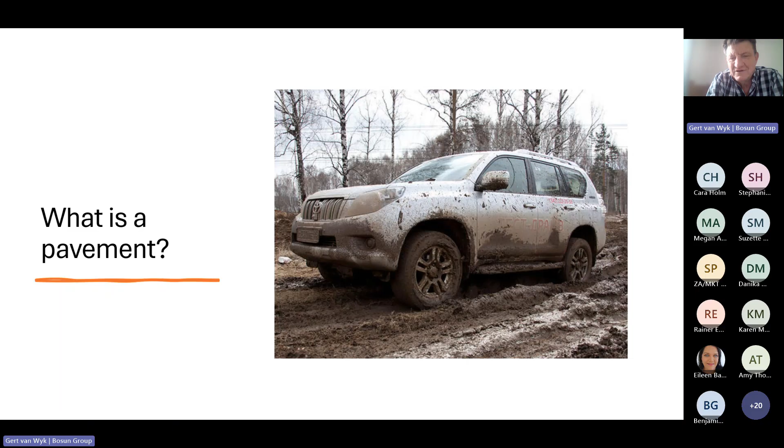So the first thing is, what is a pavement? And the answer is on the screen here. It's the opposite of what we're seeing on the screen here. A pavement is a hard surface, an even hard surface that's easy for people to walk or drive on. It's a mud stopper in the simplest form.

Now, the concept of segmented paving is not new. It's more than 2,000 years old, and the Romans made it their own. The Romans paved with segmented paving, paved thousands of kilometers of roads in Europe 2,000 years ago, and many of those examples are still functional today.

And that's the absolute beauty of segmented paving: the principles since Roman times are exactly the same as what we do today, or what we're supposed to do today. The other beautiful thing is the way they install paving in America, Japan, Germany, England, Italy, wherever, is exactly the same as the Romans did it 2,000 years ago. It's still the same thing we're doing today. So it's not rocket science.

It's not. So we don't want to make you paving installers, but we thought this is a good starting point for us as an industry to just understand the basic principles of segmented paving, because that will make it easier for us on site to communicate with contractors, to understand possible problems that we might encounter, etc.

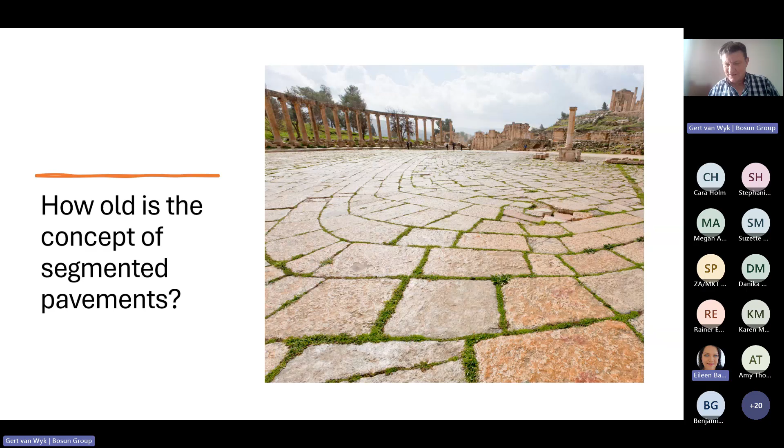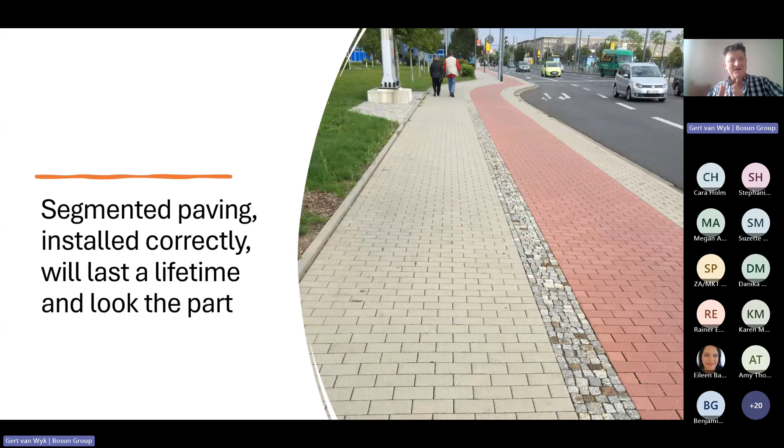I'm not going to spend a hell of a lot of time on this slide. I think all of us have seen this thing in one shape or form somewhere in our careers, but this is the overriding principle when it comes to segmented paving or block paving. If there's one thing we would wish you could take with you from today, only one thing, it would be this: the pavers, doesn't matter what the market is or what the manufacturers tell you, are merely a component of a bigger system. The pavers alone mean absolutely nothing.

What's really important with segmented paving is that you need a system, and this system needs to work together. This system allows weight or loads to be transferred from the pavers into the layers underneath the paving. So like I said, it's quite a mouthful - I'm not going to spend more time on this slide, but this is really the essence of it. We must understand that it's not about the paving as one thing; it is a combination of factors that work together that makes segmented paving do the job for us as human beings.

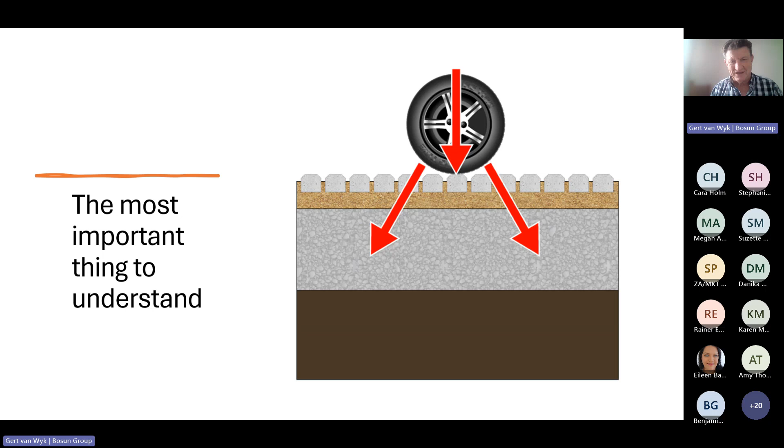So the first component - I said there's only 5, and it's literally as simple as that. The first component we must consider is a foundation. None of us would build a house without a foundation; I think none of us would even attempt that. We all know, since we've been in primary school, or even before that in kindergarten, we learned about the 3 piglets and the importance of a foundation.

With paving, because you can't see it and because people don't necessarily understand it, many times the foundation of our pavements are not what they are supposed to be. Now, I'm not going to dwell on that or make a whole thing out of it - I just want to share the principle.

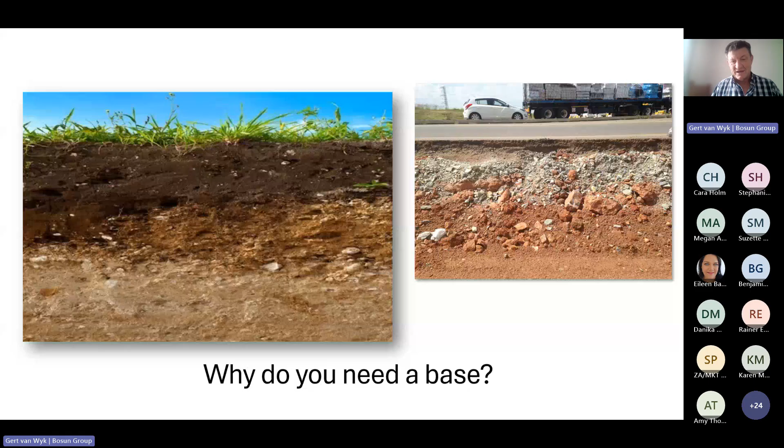Something that we discovered quite recently, and this is something we simply in South Africa didn't know — we were unaware of it. In South Africa, I don't know who of you ever encountered this discoloration of your paving, and you complained with the manufacturer, and the manufacturer said no, this is black efflorescence. So that's one name. Other people call it desert varnish. Others call it black attack — a few names for it. I don't want to say it's a common problem in South Africa, but it happens.

You could uplift the pavers. The worst thing is you can uplift and replace the paving, and in a year's time it's going to look exactly the same. Then we realized one of the things...

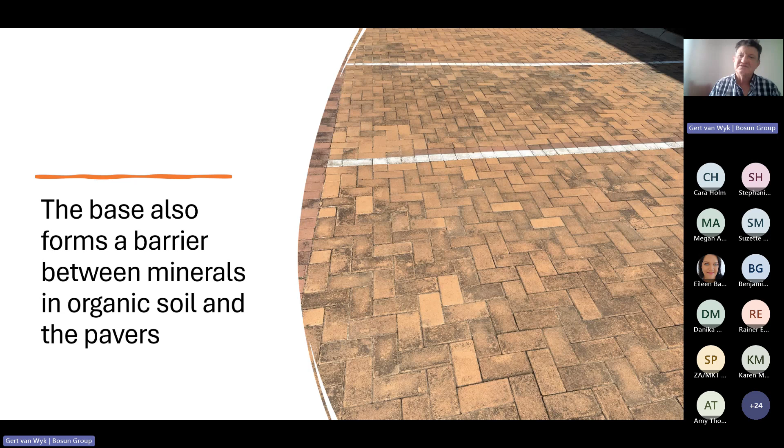Any questions around the foundation and what a solid foundation of a pavement means? Or any comments around the material to be used? No questions? No questions in the chat, and no hands are up. Okay.

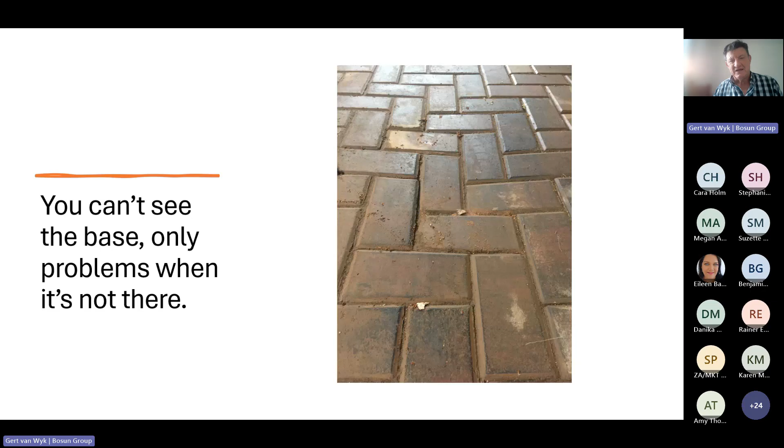The pavers collapsed or sunk, even if it just starts off like this, even just a little indentation in the pavement. The problem is that one thing leads to the next. So here we've got it — that little indentation is going to gather water. Water is going to stand there, and water is going to start draining into my pavement.

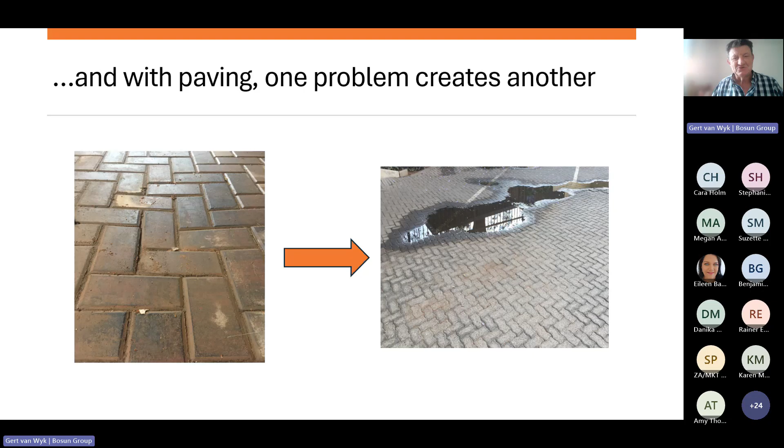And that's going to create all kinds of other problems, all kinds of associated little issues, and where it all originated is just that they didn't install a proper foundation in this pavement of mine. So here's a lovely picture of pavement failing horribly.

We can clearly see this base is non-existent, totally under-designed. If you drive forklifts on segmental paving, you have to consult an engineer. There must be some form of design underneath your pavers, otherwise it's not going to work.

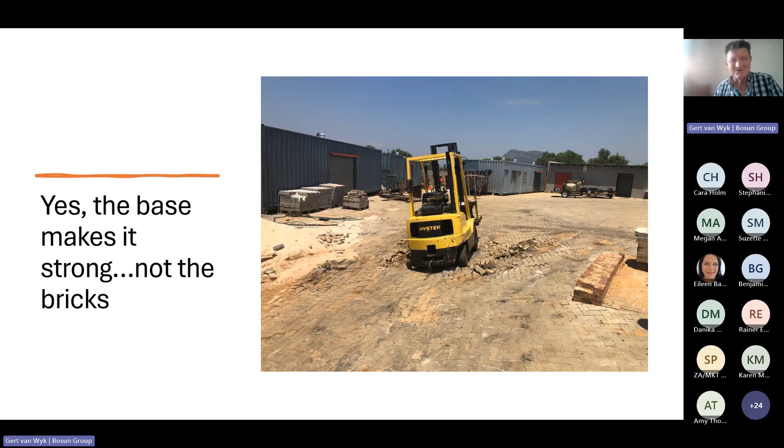Okay, so this now flows into the next aspect. So I said there's only 5. The second thing, when we think paving, the second really important, simple thing we just need to understand is drainage.

And drainage has 2 sides to it. There needs to be drainage above ground. So your paving needs to allow water to go somewhere. We can't have water standing on paving. That's going to create problems in the long term, as discussed previously.

The second side is we must also think of water that might make its way into our pavement. That needs to get out as well. So that's the 2 very important things we have to keep in account: water must run off firstly, and secondly, if there is any accidental water, we must be able to deal with that in some way.

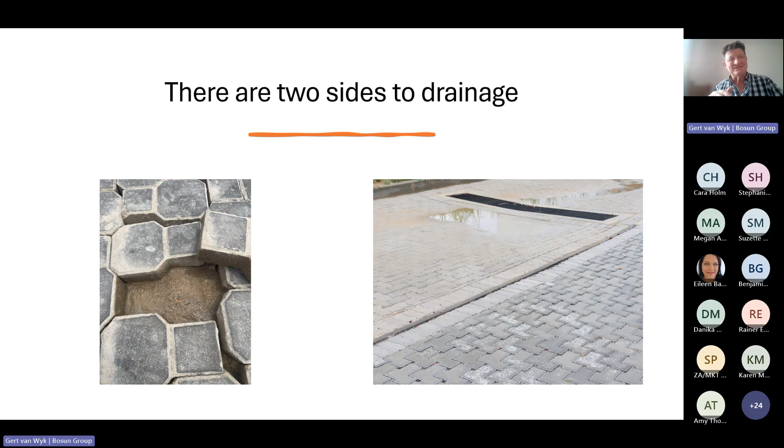And again, luckily, it's not rocket science. It's not difficult. So before I come to the solution, let me just talk about things that will stem from water infiltrating your paved system.

So both of these pictures are related to the drainage of water that might have infiltrated your pavement. On the right-hand side, I think all of us have seen something like this, you can clearly see where the cars drive. It's almost like a sand path on top of the paving. Now that is what they call pumping.

So what happens is water infiltrates the paved surface. That water's got nowhere to go, so it just sits there in the bedding material underneath the paving. Then as cars drive over it, it literally pumps out of the paved surface, and with it, it also takes the stuff between the pavers.

And then one thing leads to another. Next thing you're going to hear is clack, clack, clack, clack, clack. Next thing you know, you have to replace, you need to pick up and repave the whole thing. And it all just started with, number one, water. Perhaps they didn't allow for enough runoff. Secondly, they didn't think about

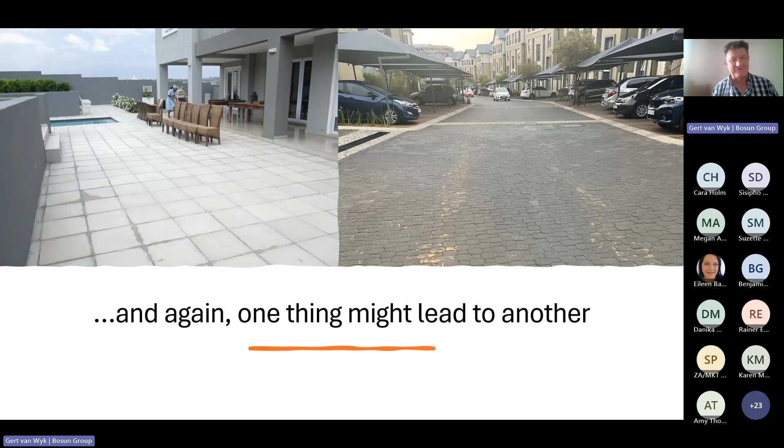And that's what we need to do with our modern paving today as well. Whatever pavement we construct, it is so crucial to keep it together, because if you don't keep it tightly together, it's going to start moving apart. And one thing leads to the next: water infiltrating causes other problems.

Problem compounded. What do we do in South Africa many times? Example on the right, just a little trowel, mortar, little triangle. That stuff always breaks, it's never strong enough, it's bound to fail. So we have to ensure that the edges of our pavement contain the whole system.

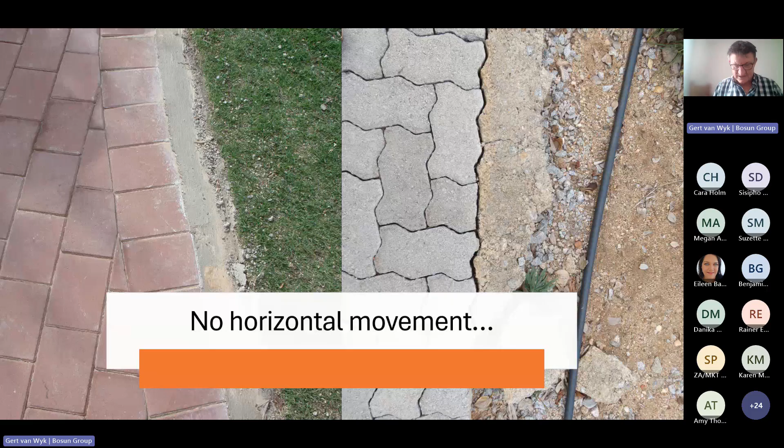Anyway, so this is then what happens. Once you don't have a solid edge, or if your edge breaks, naturally, especially with vehicular traffic, as cars drive over, these pavers are going to have stresses on them. It's going to push them apart, and we're going to learn about interlock just now - this is essentially breaking interlock.

That's why it's so crucial to keep your paving together, so that something like this doesn't happen. Going back one step, the problem now is it rains, the water goes into the paved system, cars drive over it, and this creates that other problem we talked about earlier: the pumping of the bedding material.

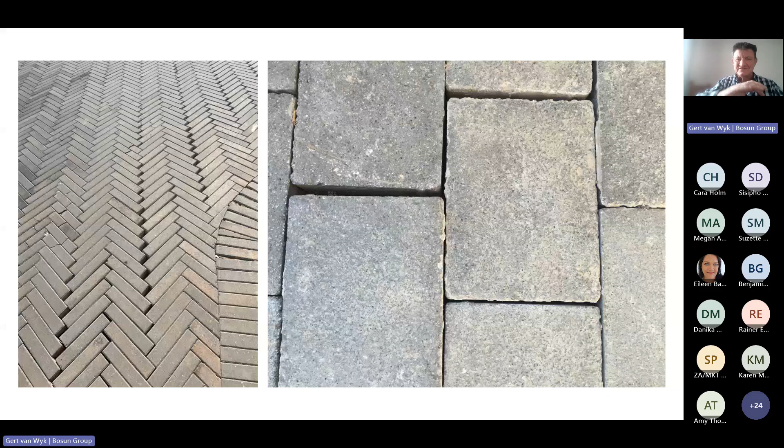So we can see it's just 5 things, but they all work together, and one thing fails, then the next, and then the next, and then it's just a complete failure.

Okay, so as promised, it brings us to interlock. Now, in South Africa... sorry, yes, sorry to interrupt you.

Just a couple of comments that have come through. Monica says you're doing very well, Gert. Bring us back to the basics, and you're welcome to put some complex stuff in. Mitha says she appreciates the topic. Thank you. And Monica also said paving contractors need to see this and hear this too, especially the council.

Agreed. So I think that is our aim, is the more consciousness we can create around just the basic principles, the more we can start sharing it.

Unfortunately, the sad reality is in South Africa, there's no place for somebody to go and learn to install paving. If you want to become a bricklayer, you can still go to places and learn to lay bricks. There's not a single institution in South Africa that offers any kind of course in the installation of paving.

Now, I think it's related to the fact that if there's a paving failure, it's not fatal. It won't cost people's lives. If a wall of a house falls over and people die, then it's a big thing - we've had examples recently in George, etc. It sadly costs people's lives. But because paving failure is never fatal, I think that was the starting point.

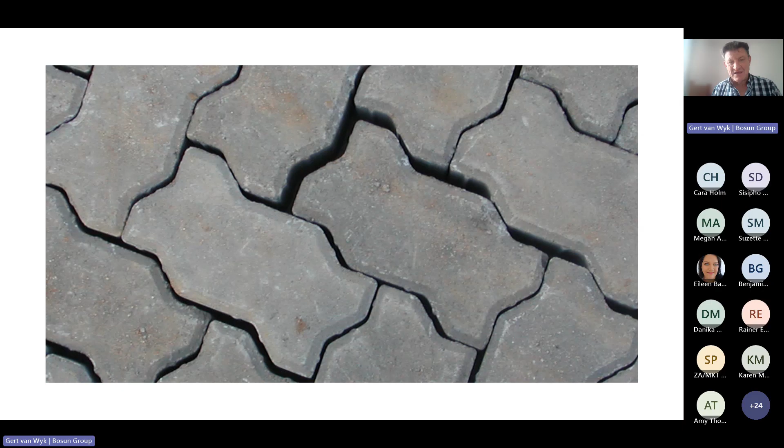Now, yes, this shape contributes a little bit to a specific type of interlock, but the biggest interlock is created by your edges and then with the material that you put between your pavers. That friction, that interlock, is much more important than the shape of the pavers. There's certain countries, the UK for instance, that have very few of these interlocking shaped pavers because they'll tell you interlock is not about the paver shape - it's about this vertical friction between the pavers that keeps everything in place.

So that's an interesting concept, and it's slightly technical, but it's good for us to understand as landscape architects - that possibly keeping the pavers together and jointing it with a good grouting material will give you a better outcome than just using interlockers. Just something to think about.

Now, if we lose sand between pavers, the first thing that generally happens is spalling - the edges start chipping, especially if there's vehicular traffic. It's directly related to the sand or grouting material between the pavers, because this friction prevents movement. If you lose that sand between your pavers, it's going to start buckling slightly, just ever so slightly, and that slight movement is going to cause edges to break.

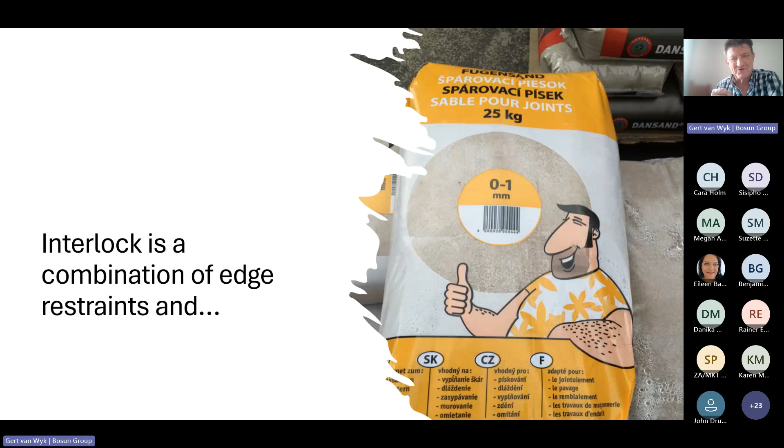The type of sand is really, really important. In South Africa, as a rule, we use plaster sand as grouting material. It works, but it's not ideal. The only message I want to leave with you is, if plaster sand doesn't work on a specific site, there are other options.

You want sand that will create better friction between your pavers and that will stay in your joints better, because that is a common complaint: now the sand between my joints is washing out. We've got many solutions for that, so that might be a topic for next one of these presentations in our program.

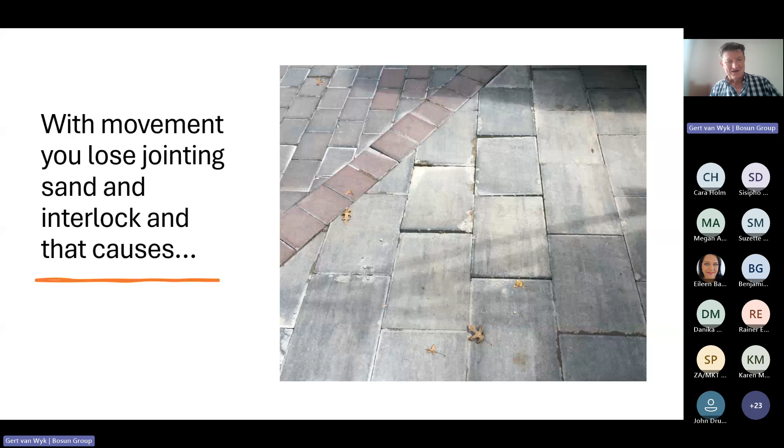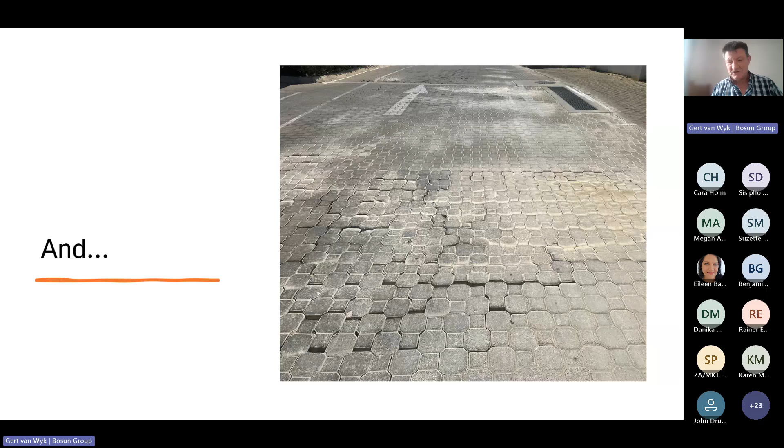So here's a typical example of a pavement that lost its interlock. Then water started infiltrating, and we can see the discoloration on the pavers. We've all driven over paving with our cars and heard this clack, clack, clack, clack. This is exactly what happened. The starting point is this: you lose your grouting, and probably before that there was some issue with the edges, a little bit of movement. Once it starts opening up, all that stuff that should be between your pavers just falls through into your bed.

Sorry, Gert, for interrupting, I do have a question. Elise is asking, sorry if she missed it: what sand would you recommend instead of plaster sand that is available in South Africa? And would it make sense to regrout paving from time to time? Sorry if it's a stupid question. No, not at all, it is a very relevant question.

Now I need to be careful because I don't want to promote anything. In our group we've got this little company called Creetsol, and one of the things they supply is all kinds of specialized grouting materials. They sourced a sand, and it's quite simple - you don't have to get it from them.

It is a silica sand. The reason silica sand is better, and the reason they use it overseas, is that it's not a round sand - think plaster sand, it's round and soft. Silica sand has edges, so if you take sand between your fingers and rub your fingers, that's what you want, as much friction as possible. This silica sand creates that friction, but it's important that it has the right grading analysis.

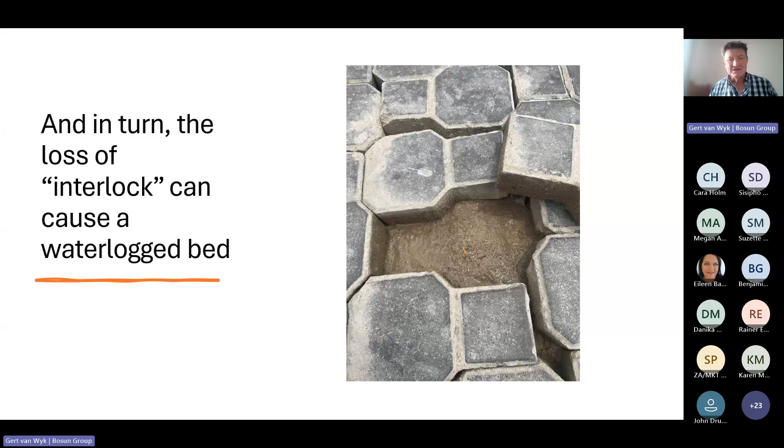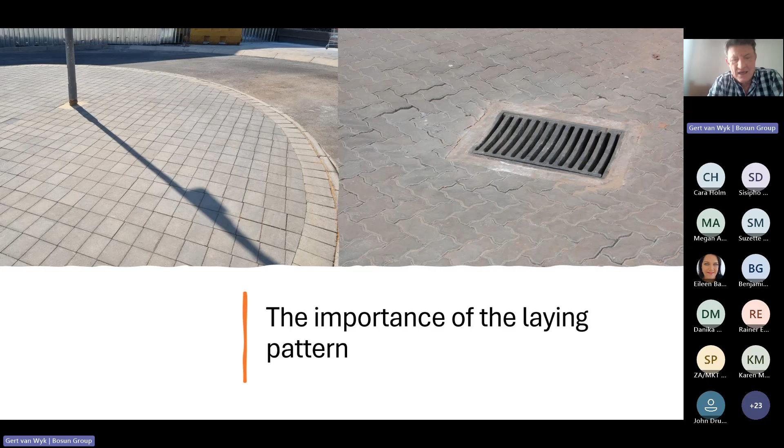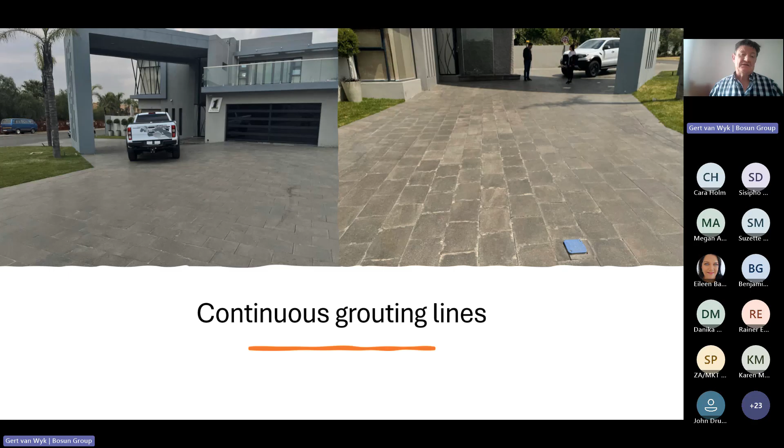If there is vehicular traffic, yes, first choice is always herringbone. But if you want to use a stretcher bond, just make sure that the continuous grouting lines are against the traffic, or at 90 degrees with your vehicular traffic. It is just going to prevent movement of your pavers.

Right, the last aspect - and again this is so interwoven. Paving manufacturers will tell you, like tile manufacturers, like brick manufacturers will tell you, it is impossible to consistently manufacture pavers that are exactly the same size.

In fact, the South African national standard, and not only the South African - the American, the German, whatever national standard - specifies a 3 millimeter up or down allowance. So if we say a paver is 60 mils thick, it might be 63 mils, it might be 57 mils. That means two neighboring pavers can be 6 millimeters bigger, thicker, or thinner.

It's a big number. Now how on earth do you expect us to install pavers then? That's what the contractor would ask. The question, or the answer to that, is quite simple. This is how the Romans did it. This is how everybody does it - you install it on sand.

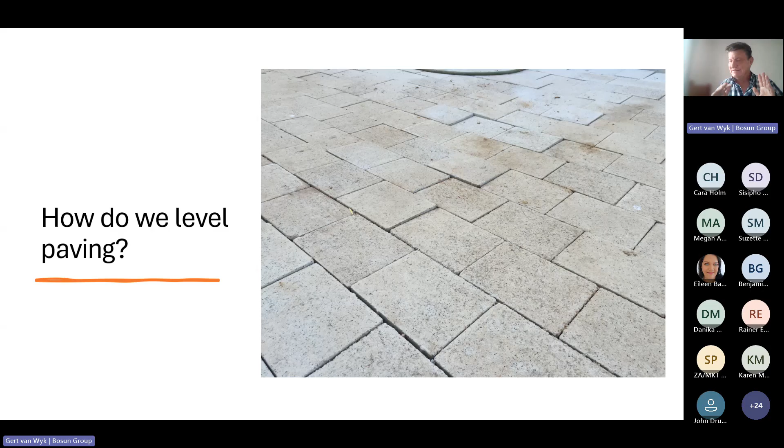Yes, it is difficult, yes it does cost money, but this is how it's supposed to be done. Moist sand, compact your pavers while the sand's moist, so that the pavers can sink into the sand evenly.

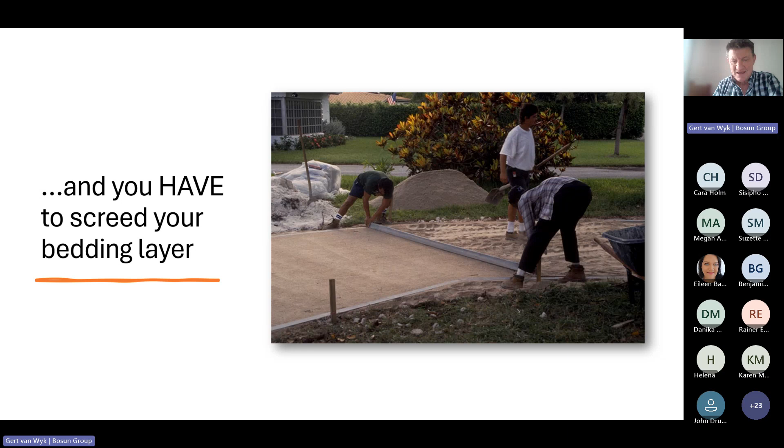Right, so that is Mev. Do you know the answer of this question? Perhaps we should leave this for next time. Should I quickly answer it?

What do you think about plastic under paving? So after hearing these 5 principles today, what is your comment about plastic under paving? If anybody would like to unmute and just quickly answer that.

Megan says she reckons not, because it makes it less pervious - makes it 100% impermeable. Metha says it does not seem necessary.

Definitely not necessary. It creates problems because, as we said earlier, it's really important that water that might infiltrate your paving must be allowed to drain. If you put plastic in, that water has nowhere to drain, so it creates huge structural problems. And the worst part is it doesn't even help with weeds, because weeds come from the top - from seeds and bird droppings and so on. It doesn't grow from the bottom. So the only way to get rid of weeds or prevent them is to sweep your paving regularly, disrupting the weeds and not giving them time to germinate. So plastic under paving is a no-no - it just creates so much trouble.

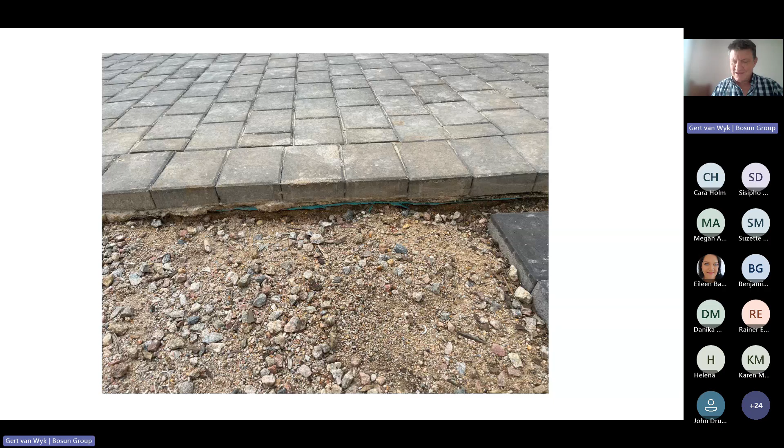Commercially, we generally don't have that problem, but residentially I can't tell you the number of complaints we're getting. We get to site and there's all kinds of complaints - the paving's discoloring and it's different. We get to site, and like this site, the first thing you see is there's plastic underneath. It creates more problems than anything else.